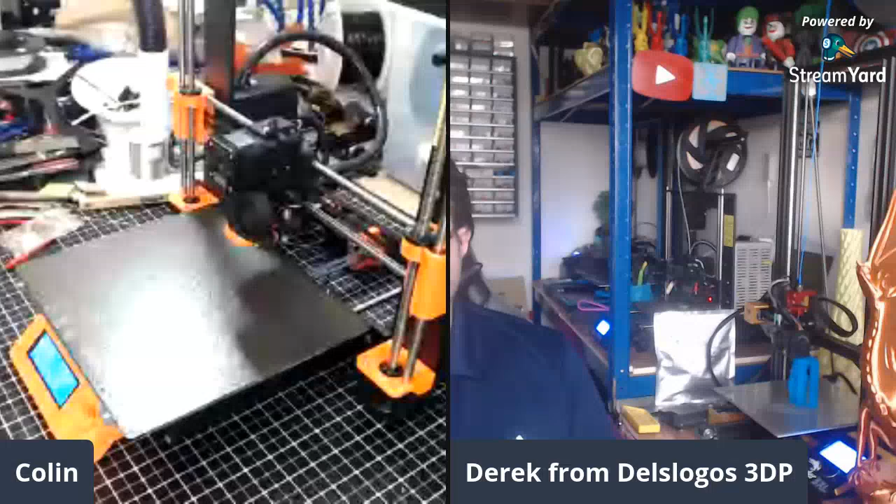Today we will be attempting to assemble not this, but my Prusa-ish Mark III-ish machine that I'm going to bring to the East Coast RepRap Festival.

Derek, thanks for hanging out. This is going to be an interesting one.

I've not used StreamYard before, so it's looking pretty slick. It's got a lot of cool features. I guess somewhere in here I've seen that people will add display comments from YouTube.

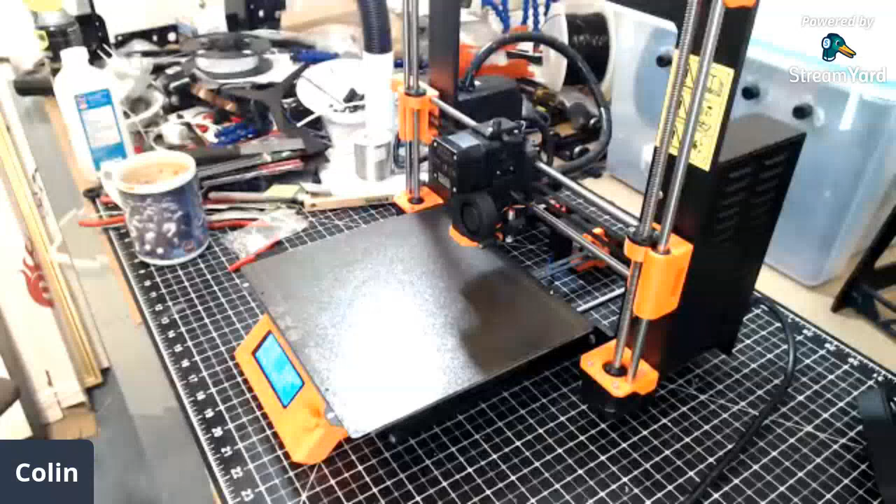I don't see how that's accomplished yet. Enter example banners. Okay, so you can build banners, but somehow you can present comments from YouTube. So this is 2 up, this is 1 up. It doesn't... oh, I guess I can remove from stream. Solo layout - it's not clear how you get the solo layout. Oh okay, there you go. Set your solo layout, side by side, 3 up, or however many up.

Share screen. Okay, that's cool, share screen. Well, that's not share screen. And that's something else. Okay, well, so...

How does one present YouTube comments? Banners, brand, private chat, comments. Aha! No, that's the private comments. Or no, maybe that's the YouTube comments.

Have you listed the program on YouTube yet? So apparently it's managed - I didn't do an announcement, I just went live. So apparently it's managed entirely through the StreamYard API, not Wirecast.

So you're half off screen there. I guess is that a function of having selected the half screen layout? Okay, you can have it as 2 full screens. Okay, so I see what's going on here. So you have top chat, live chat.

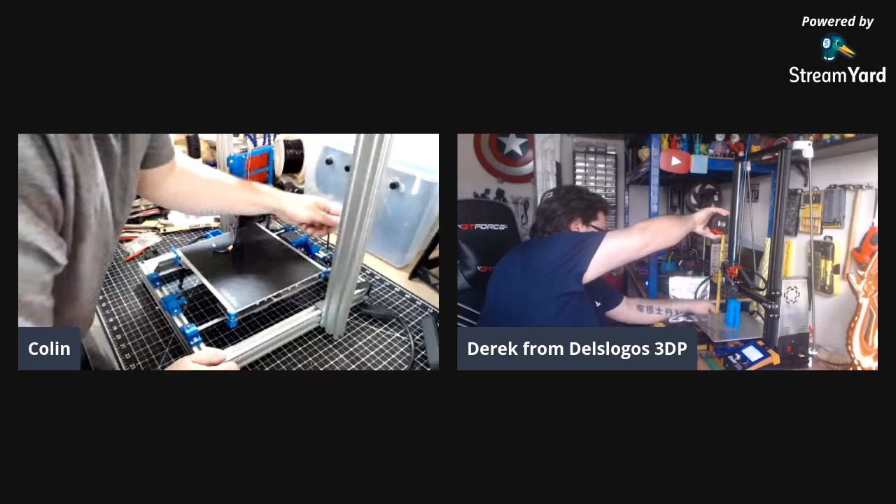Yeah, I mean, obviously you lose a little bit in height - you lose a little on the top, and on the bottom. The bottom, until you get to the build surface - those things are for the bottom rails, right? Yeah. Yeah, you lose a little bit at the top, and obviously at the bottom you lose up until the actual build surface. So, to the build surface itself, you're losing nearly 70 mil just to the build surface.

I'm doing this the wrong way, aren't I? Oh well. I should be disconnecting the bed, from which I need a Phillips screwdriver. Okay. Unless I can just sort of slide this over. No, it's not going to work. All right, I need a Phillips screwdriver.

Hey, right back. All right customer - yeah, I'm guessing the wife wants to watch TV, so better let her do that.

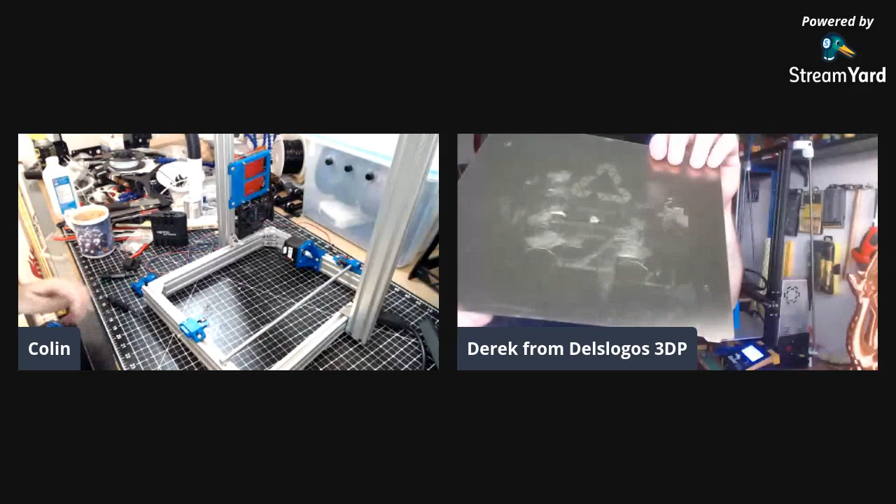Yeah, the worst case scenario is when you get a brand new build plate, a lovely PEI sheet, and then you do that to it. Well, that I actually did - did I do it at ERRF last year? I think I did it almost immediately afterwards. I got a replacement sheet from the folks at BuildTak from their booth. They were very kind to give me one, and then I proceeded to grind the head into it because on the very next print my Z sensor died.

So I spent the rest of ERRF trying to get a replacement 5-volt inductive sensor, which of course nobody had. Eventually I gave up and went with a backup and put back the mechanical sensor, and then printed a few things. But yeah, there were a lot of people there with some very, very dead printers. It was sad in one way, but I felt great camaraderie with everyone who had put their printers in a car and allowed them to vibrate themselves apart for 6 or 8 hours.

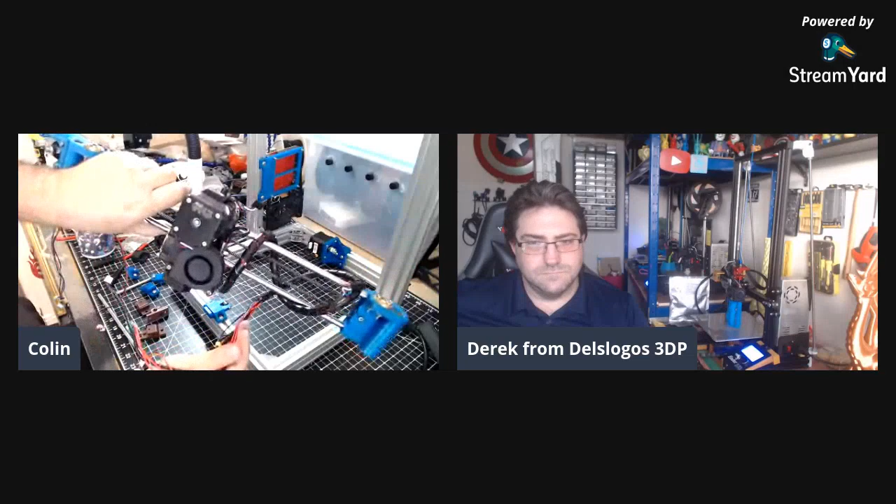So that's going to be moved over, and the main difference in the x-axis is going to be the width between the rods. We're going to use the Prusa width instead of the ANET width. Really, all that means is I need to replace the two back plates of the carrier, the X carrier. But am I going to run into problems here with this? Yes, certainly.

Okay, so I have a little elephant foot in here. That's irritating. Well, that's one way to fix it, just push it through. This is a glass table, so I'm not sure I want to do that too often. Not a good idea. I have files. Let's see, have I a sufficient round file? Yeah, maybe.

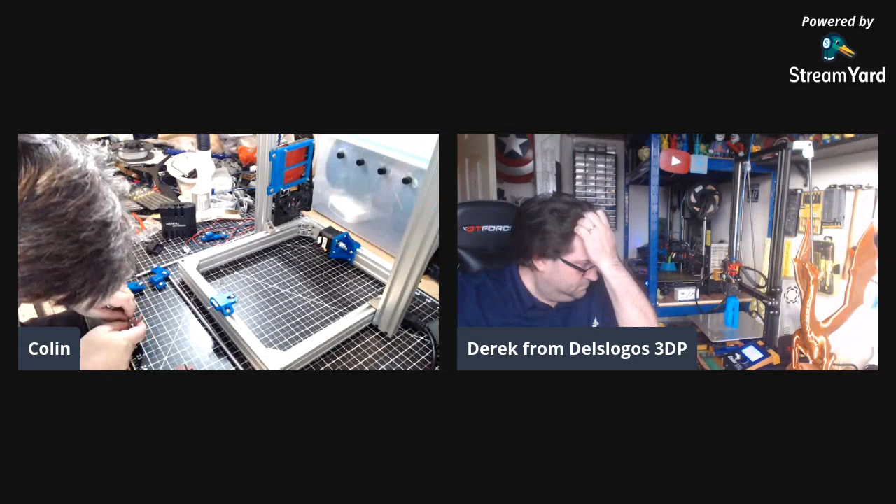The other thing that's going to be interesting about this build, or not so much interesting as problematic, is the Z height is really, really tight. I think it's a couple of millimeters shorter than, well, it's not actually, is it? Not actually shorter than the Prusa. I think the Prusa is actually shorter than the ANET by a couple of millimeters. But the alignment of the top and motor mounts are going to be interesting.

Yeah, by virtue of the sizing of the rods, again, where the Prusa motor mounts have a cap that encloses the rod, whereas the ANET allows you just to slide it through.

So, Scalda, what have you been up to? I think he's disappeared. And Gustner said nothing in a while. Should we just assume people disappear? Yeah, we should just assume that we're boring.

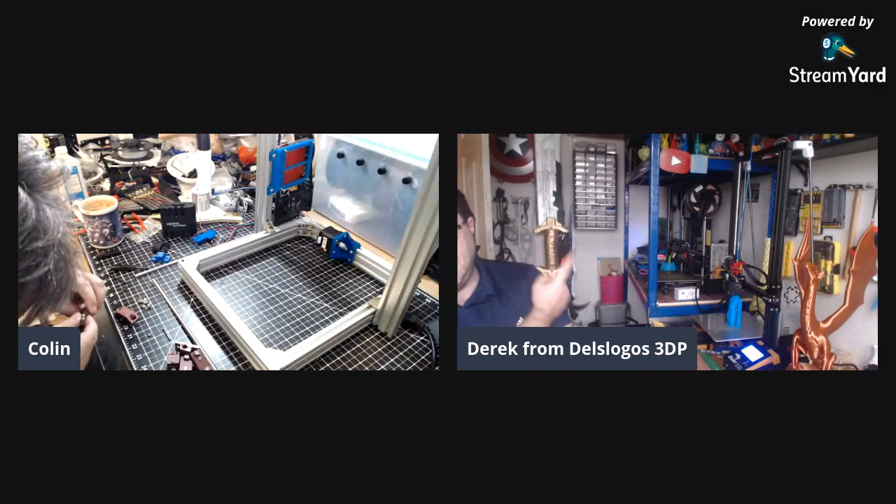Yeah, but when you get a design from someone and print it out, such as my Thanos blade, you'd think that there wouldn't be any post processing on it. Well, I mean, not necessarily. I guess to assume that any other designer would be against post processing to the extent that I am is unreasonable. But no, I guess I'm just lazy or something.

Well, the blade came out fine, I'm quite happy with it. A lot of people on Twitter all jumped in, even Joel Telling, even Uncle Jessy all jumped in and said it looked really good. Yeah, it's not a model that I hear about being printed very often. So that's the thing, when you get these models that everybody and their brother prints, they do it all in the same week or month, and then that model goes out of fashion again.

I guess I might consider printing some of the stuff from the Broken Nerd. He has some really cool designs. Yeah, I mean, I got the design for the Thanos blade off of Sean, off of 3D Skewed. I got it off of him because obviously, supporting the people I like and stuff. Yeah, so he's a good guy. I mean, yeah, I got it from him.

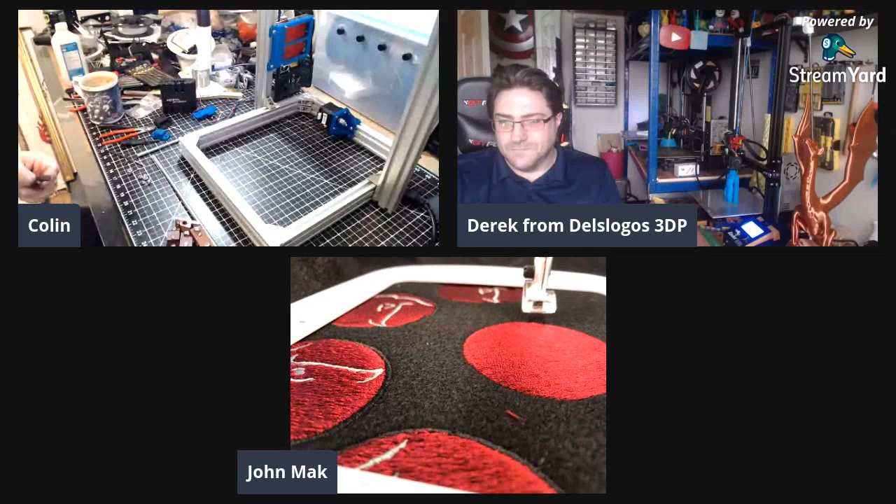This Delslogos logo. Oh, that's cool, so who was it? Somebody was complaining that they were not getting a hat, they were kidding, but who was it? I can't remember, I'll let them hassle you for it at some other point.

So how's that going? Are you gonna end up turning that into a business? Yeah, it's Ken's business, so it's already going. Just changing color or changing filament.

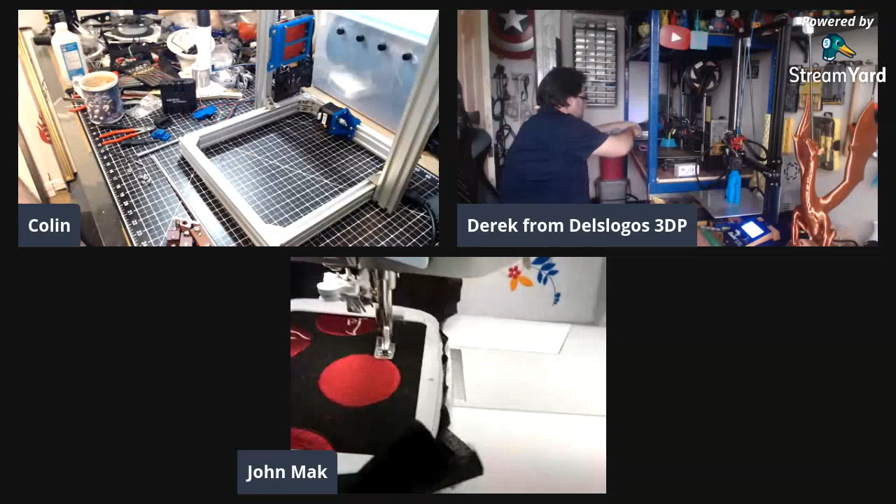So what's the timing on printing something like that? It just depends on how many stitches, the density of stitches. Yeah, that makes sense, about 15-20 minutes, depends. Really, that's not too bad. Beats 3D printing, in one layer.

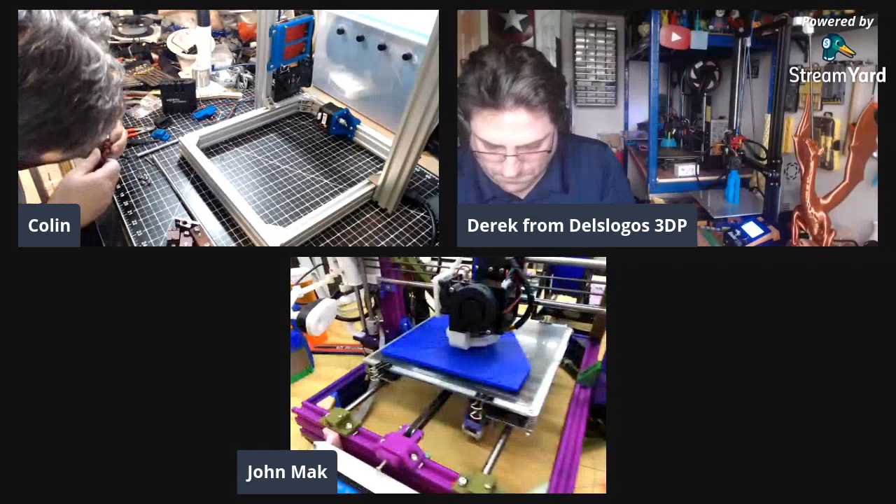I do have 3D printing too, but I'm just printing like templates for programs.

So are you streaming on YouTube or some other way? Yeah, YouTube. I was trying out Wirecast earlier, they've got a mechanism called Rendezvous, it's very cool, but it doesn't lend itself to this kind of hangout environment. It's more tailored to scheduled guests, where you have the guest join the session, and then you can set up a screen layout where they can appear, but I was encountering all sorts of other issues.

So it's time to change the gray filament. Attempt number two.

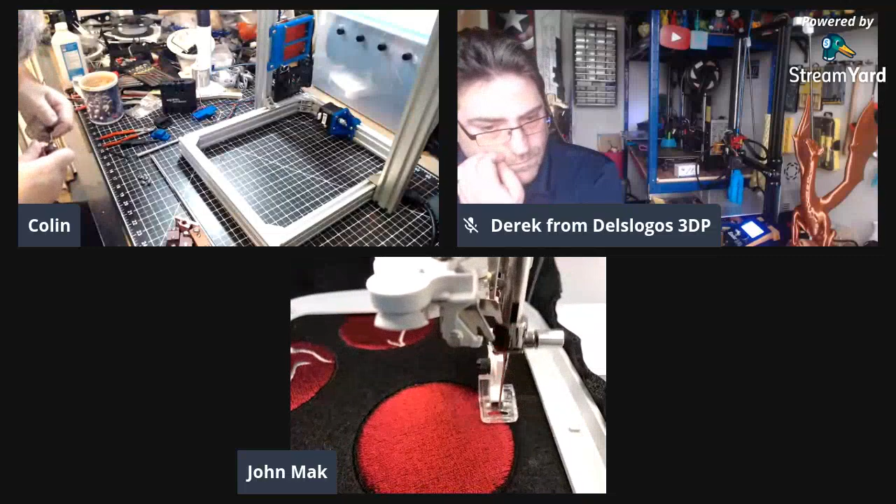While we're singing the praises of the AM8 reinforced build kit, one of the things they had were motor mount and y-axis layout jigs, which were very cool. Surprised other of these designs don't include them. Just stitching the gray.

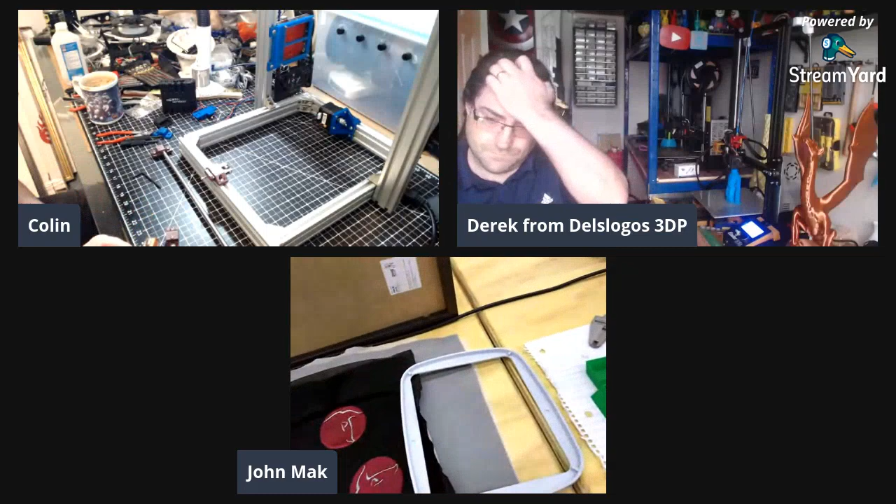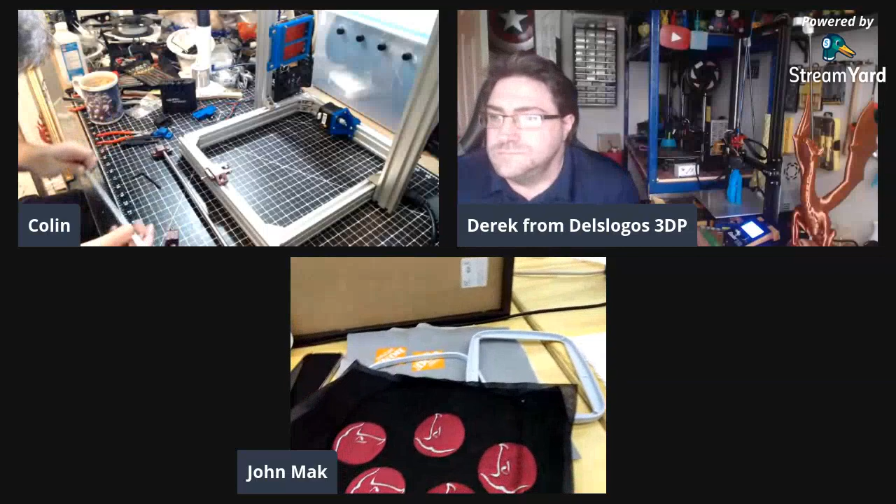Let's see, I guess I want these all facing the same direction, I could cut it out and send it to him. Why would you? And then this one, yeah, this guy. Sure fits. Okay, cool.

Well, printing these parts on the Prusa is so much better than printing them on - what did I print them on last time? No, I printed them on the original A8. Which, can we see the original A8 over here? Yeah, there we go, original A8.

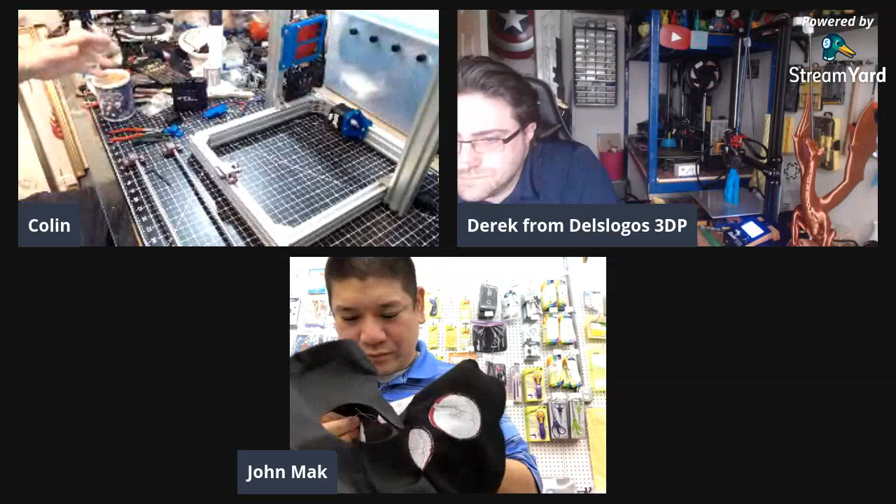Those other blue parts, where did they come from? They were all printed on the old frame, and I then took the printer apart and just hoped beyond hope that I had printed all the right parts so I could put the printer back together on this frame. Back when I had not so many printers.

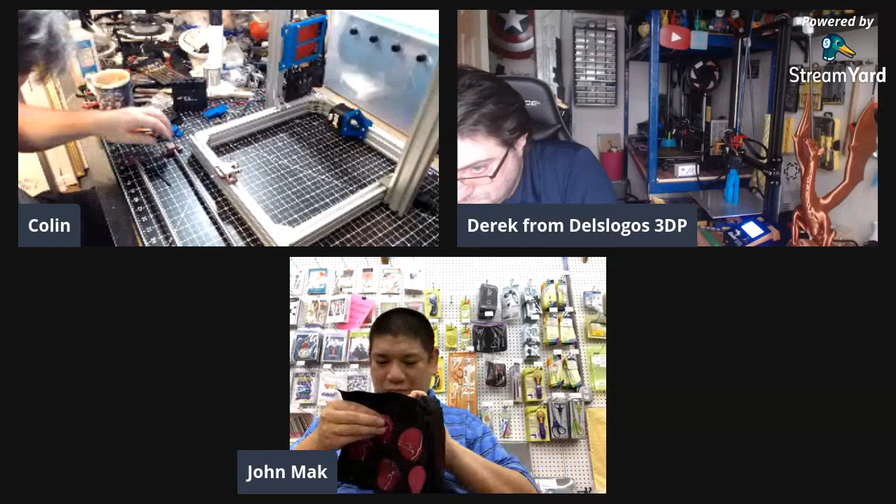I guess before I put this on, I should put the motor on. Maybe. What do we think the correct order of operations is here? Motor mount first? Probably is - no, I can't remember. I'm certainly not looking at a manual, that's just admitting failure. Oh, I thought you got an AM8 already. I did, I just don't remember what the order of operations was. This was an AM8, now it's going to be a Prusa Bear.

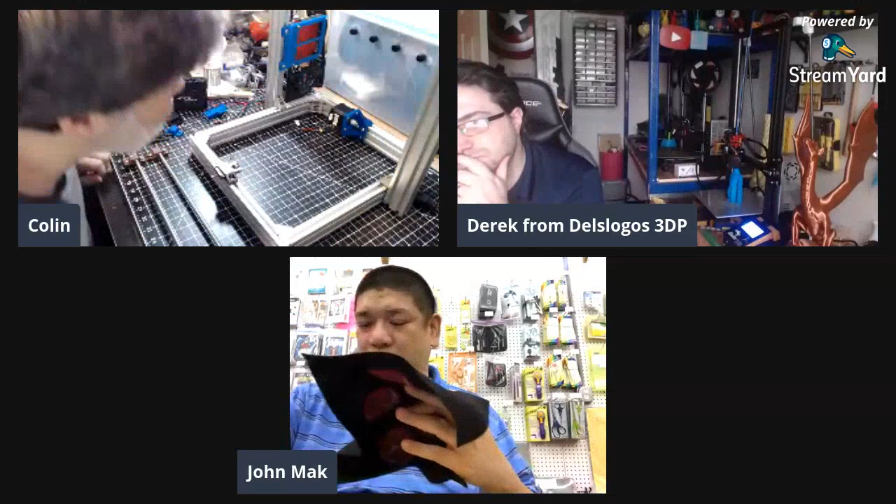So I guess first we need to remove the motor from the mount. Or do we? Maybe we don't. No, we can unmount the thing without removing the motor, that's probably better.

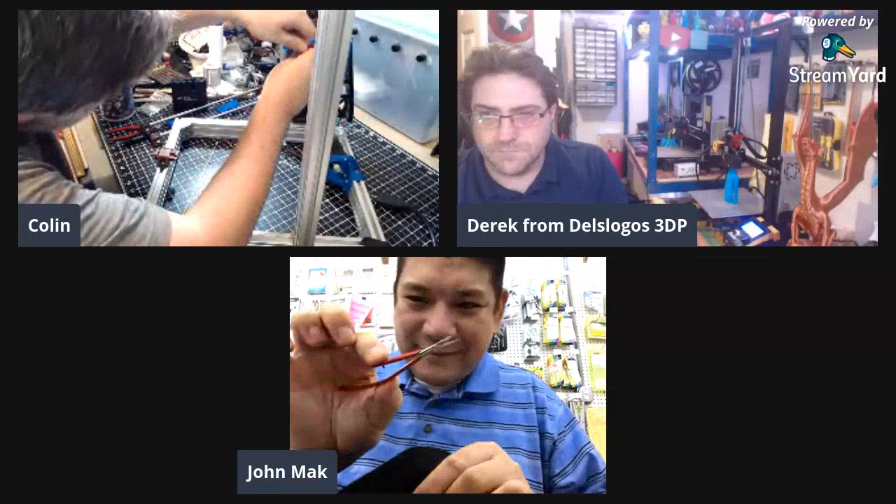Although I should probably remove the electronics here since those are definitely - it's my tiny scissors. Precision tools, don't knock them.

Now what did I do last time I was doing this? Oh, this is my solution for pulling out hammer nuts.

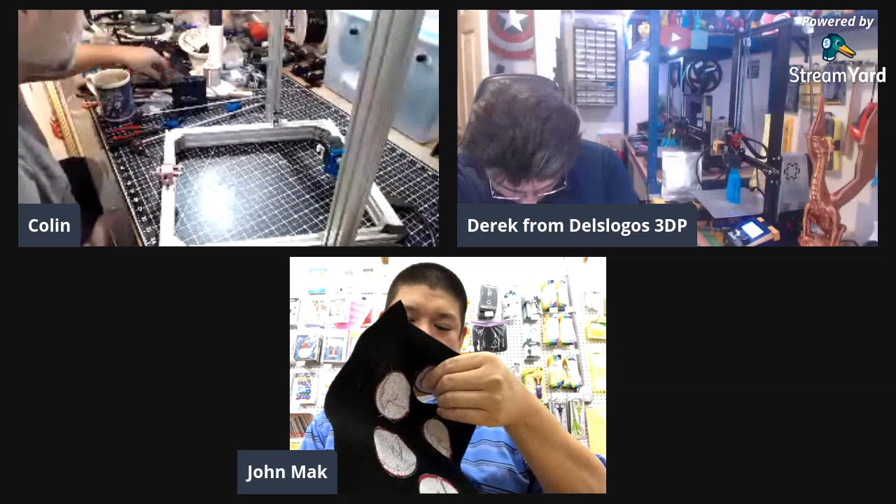Oh, that was my high security electrocution preventer, because I had the power supply mounted here, but there was no bottom to the switch cover. Was it already plugged in? It was not the safest arrangement.

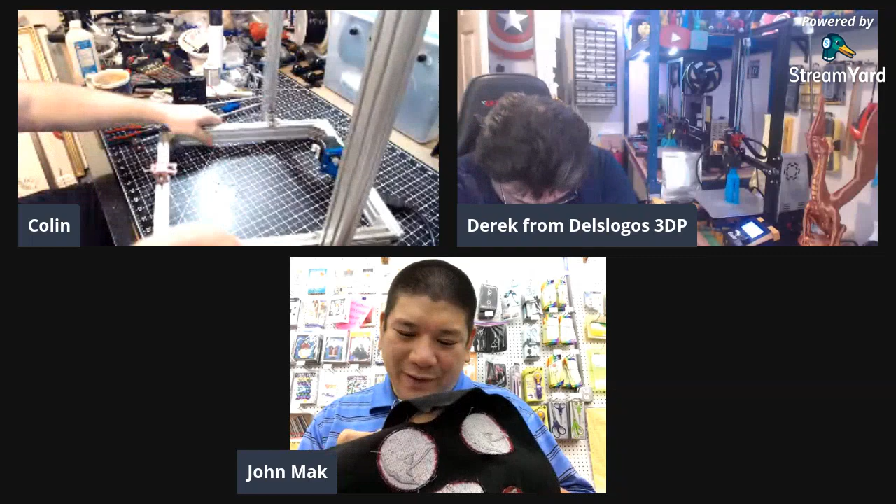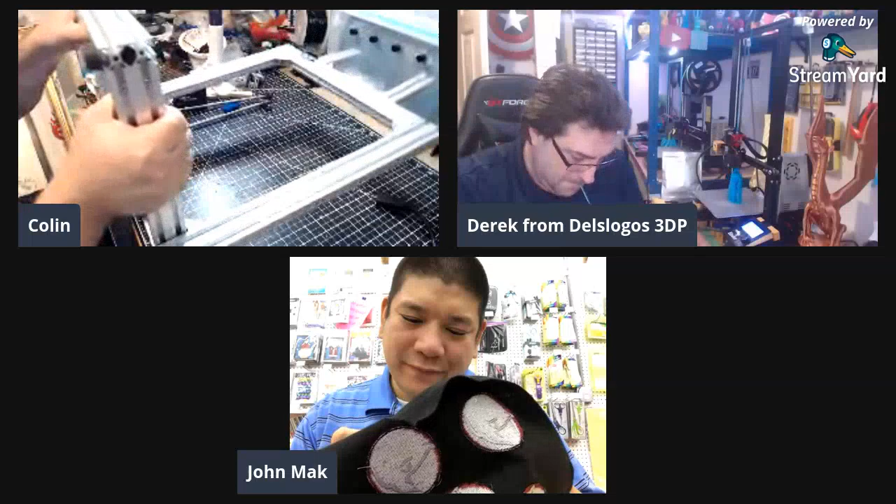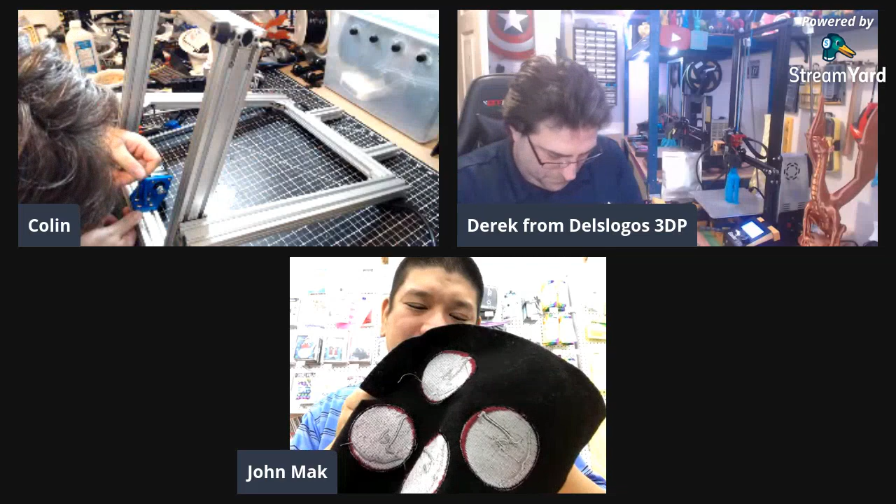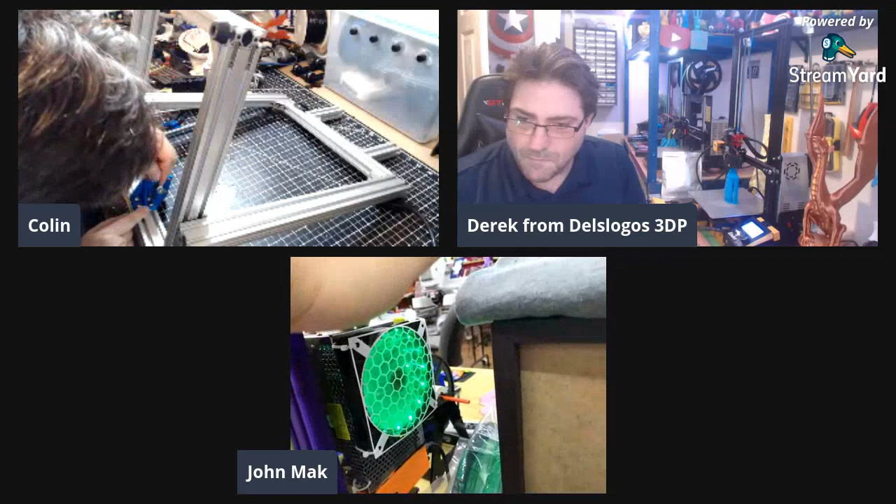Yeah, that was actually one of the first things I did with my AM8, was replace the power supply. I'm still on the original power supply though - it's been going on like 2 years now. I just have to keep it cool with a big giant fan.

Although I imagine you could put a Raspberry Pi on there and control the color through some web interface if you really wanted to. I think Octoprint actually has a plugin for RGB lighting. Do they? Oh, turn green when the print is done, or turn red while heating, and then white while it's printing. Huh, I remember reading about that.

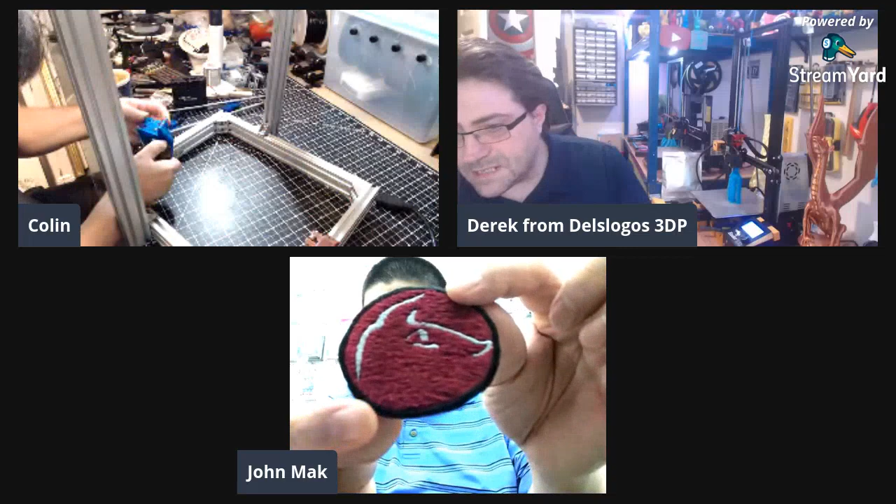That's not bad, so there's one patch cut out. Yeah, that's cool, is that for llama? Who's that for, John? Yeah, Tom Llama - 3D printing llama. That's really cool.

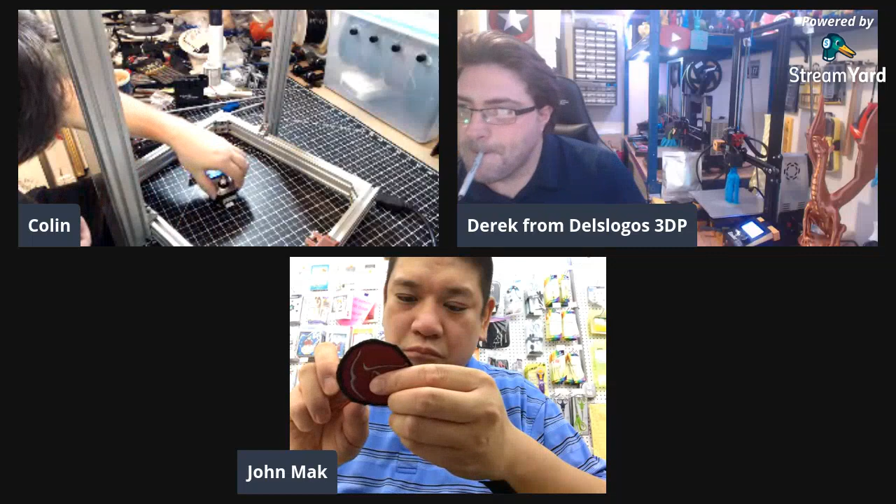I guess I'll use the big scissors to test out before I use the tiny scissors. This looks like a Y motor mount. Right?

Hey John, what do you think of my Ender 3? Oh, looks good. I should probably get an Ender 3 to replace the A8. How many A8s have you got now, John? Still just 3. Yeah well, 3 is not enough, you got to have 4, make it a nice even number. Yeah, but the Ender could get better quality out of the box.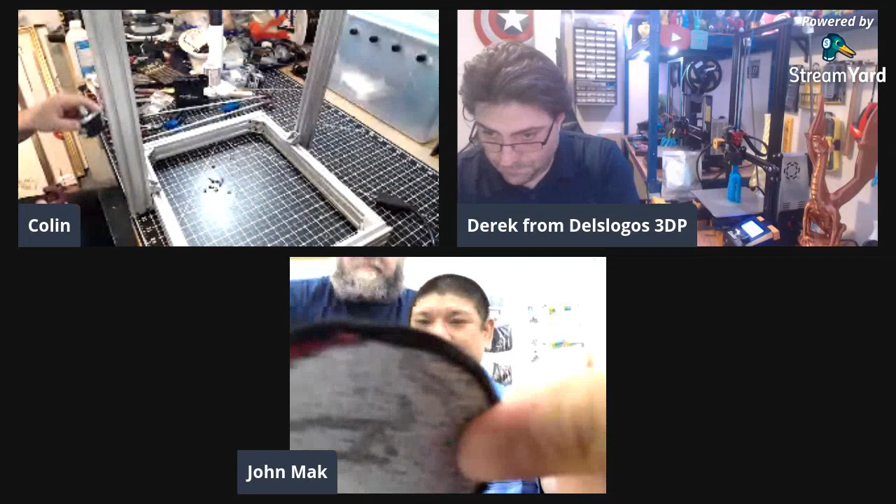But yeah, where every one of the AM8 reinforced parts had like 5 or 6 fasteners, all of the Prusa Bear parts all have like 2. That's no good, is it? Well, I don't know, I mean structurally it doesn't seem any less sound. It might last less well in the car. I don't know, we'll see.

What happened here? So I guess the Bear frame's supposed to be more stable than the Prusa frame? The Bear frame's supposed to be more stable? Supposedly, I don't know that it really is, but.

Oh, this sucks even more. What size of bolt do they expect to use? Am I going to have to redesign these parts? Oh shit. Well, this is a problem.

Don't they fit? Oh, every one of these holes is not deep enough for these bolts. I can't screw something onto that. So you need longer bolts. Need longer bolts. Well, in some cases, I guess, not all.

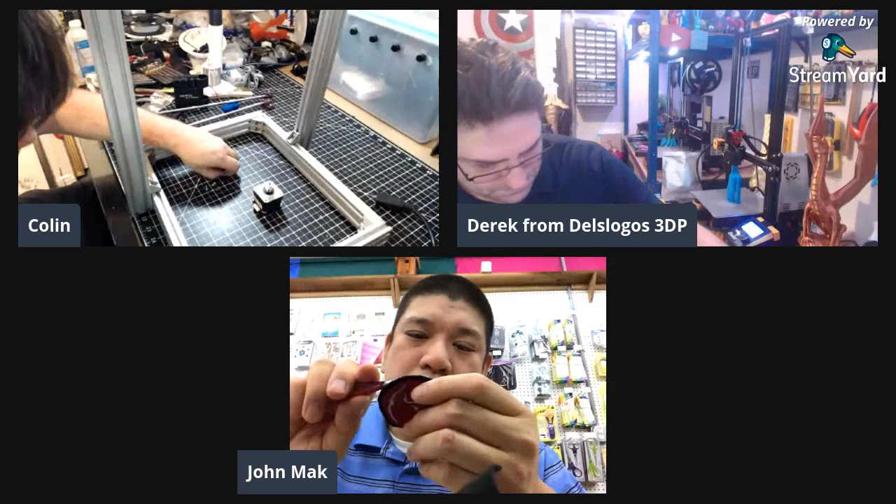Open up Amazon Prime. Yep, there we go. All right, so these motor screws can go in our box of motor screws. Actually, I might just go down to, we have a store here that's sort of a retail McMaster Carr kind of place called Fastenal that probably has the right bolts. Let's see how many of them I'm going to need though. So there's these 2. Let us look at some other parts here.

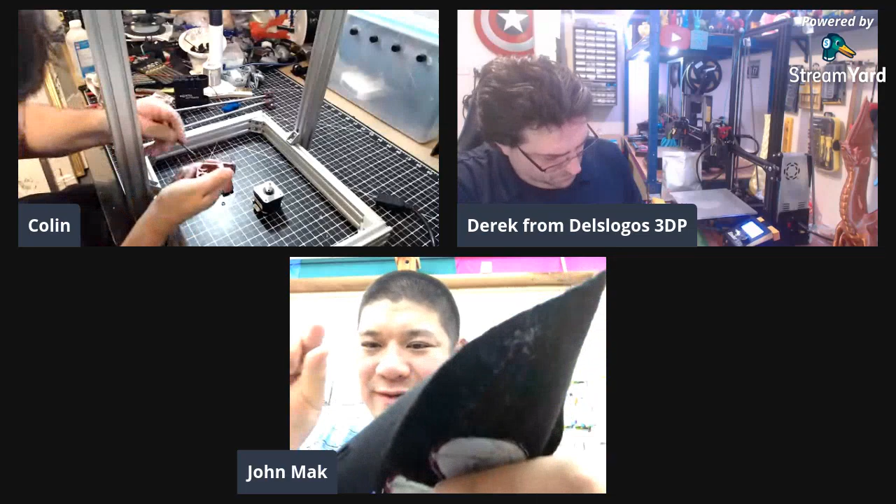I can't push this through because it's rubbing against these two corners. Well, maybe there's a different type of M5 bolt. I'm sure it is, but how many? I mean, M5 is M5, right? I mean, M5 only specifies the thickness of the bolt.

Right, but it also specifies the size of the head. There's different style heads, I guess. All right, I guess they have to be more specific. So there's that problem and that problem. These are not a problem. Okay, so it's this and this.

Now, what I really ought to do is take a piece of extrusion so I can test the issue. How many do I need here? Three each. These fit, right? No, what didn't fit was the Y motor, which requires two, and the Z tops, each which require two.

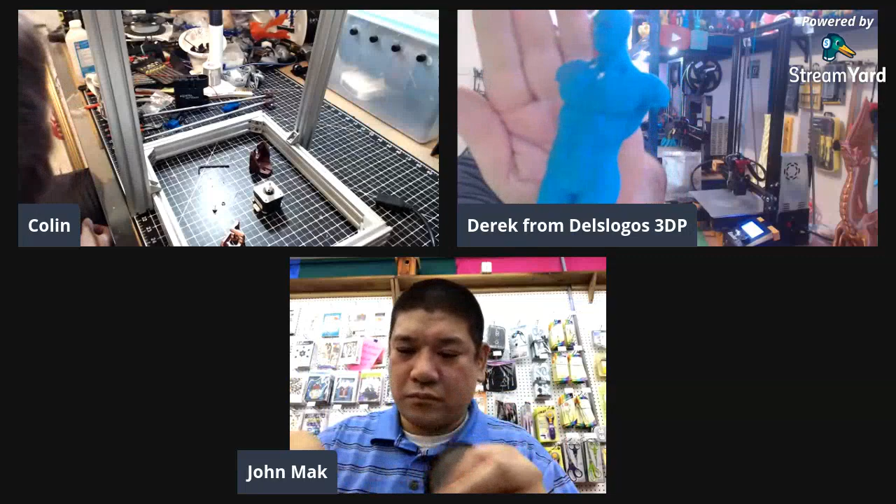And how does the Y motor... Okay, so Z top and Y motor mount. Anything else, other than weird pieces that might require weirdness? The power supply bottom thing here.

Well, I did fully expect this to be a thing. Okay, that works. What are these, M5 by 10, maybe?

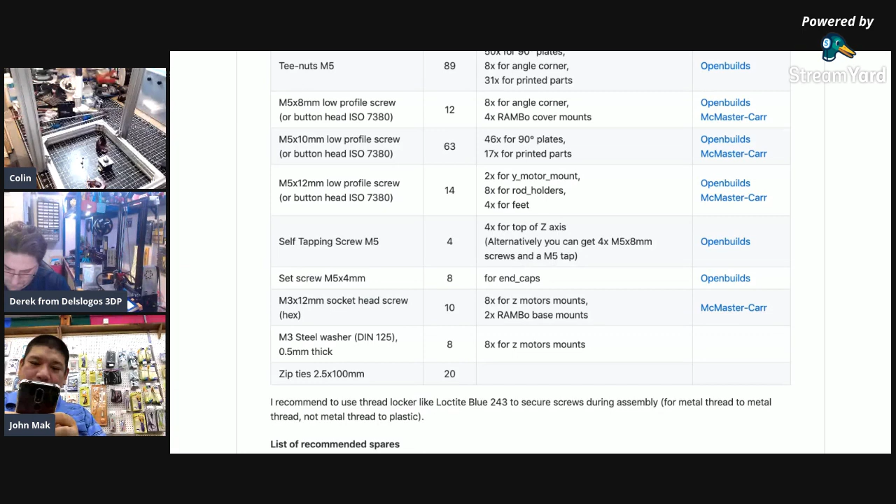That's crazy. All right, I'm almost inclined to go see if somebody else has better Z tops and Y motor mount. Because I mean, I can go spend - it'll probably cost me $5 or $8 for like 10 screws, but that seems stupid.

All right, so let us look at forks. This is not the way to do this, is it? Looking at forks is not going to tell me anything unless I go through each of the check-ins. What would be the better method? I guess Thingiverse, right? Yeah, see if they've got it on there.

Yeah, that will work for the AM8. Well, so I don't know the one with the Y, right, for the AM8 reinforced - it was very cool. It had these little things that just sat in the T-slot, slide the thing back and forth until it slides easily, and then screw it down.

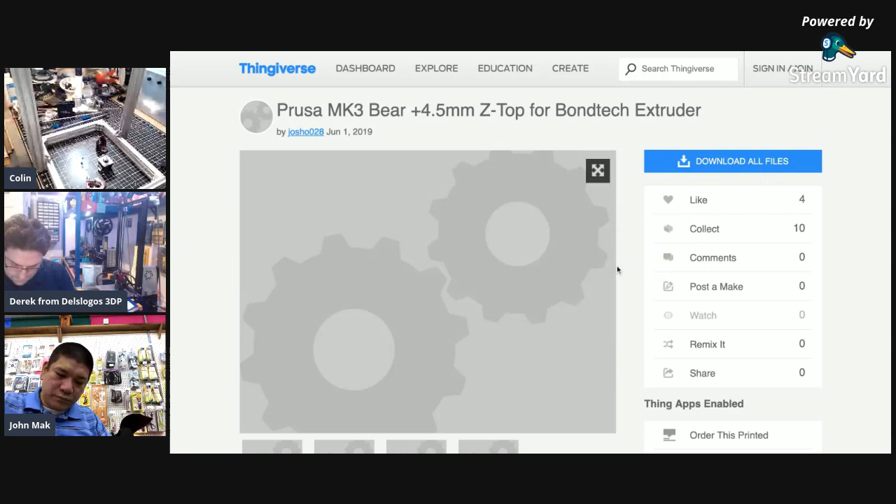There are all sorts of fun things here. I'll have to go through these in more detail. Okay. Mark III Bear plus 4.5 millimeter Z top. For Bondtech? What on earth does that even mean?

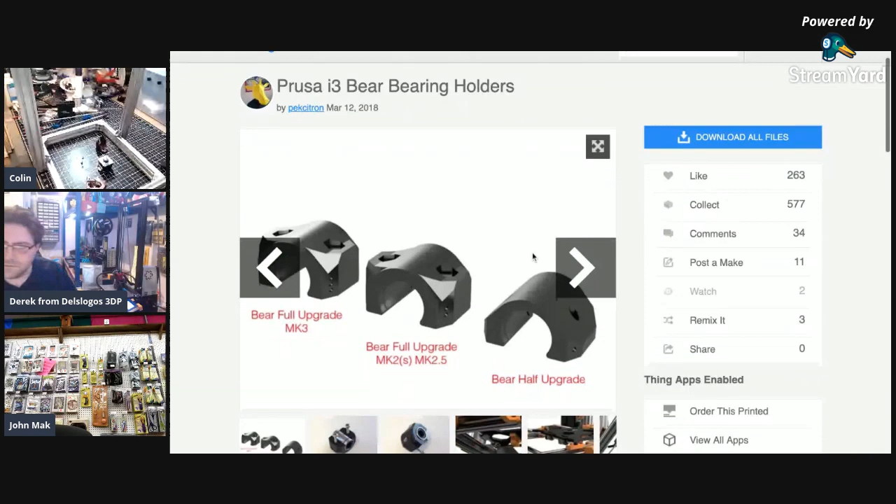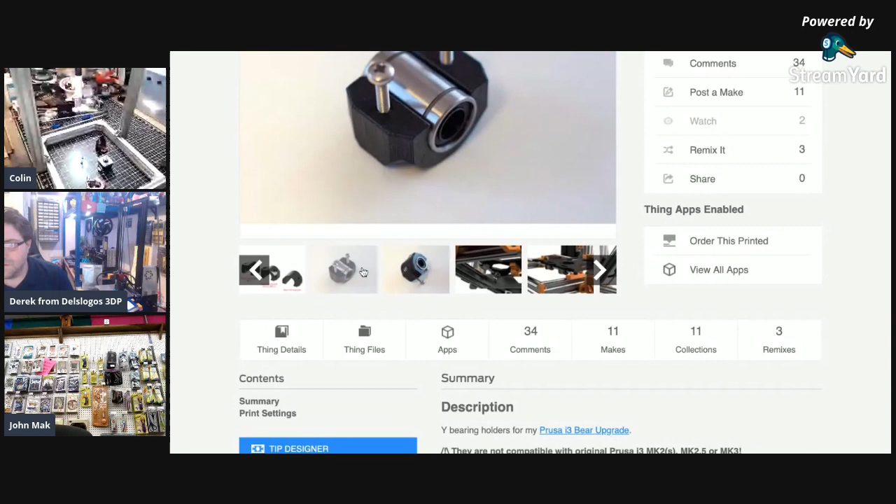So these are not the same bearing holders that I printed. These are somewhat cooler looking. No, well, maybe not. Oh, these don't support nuts. They require significantly longer screws. Okay, I printed the right ones then.

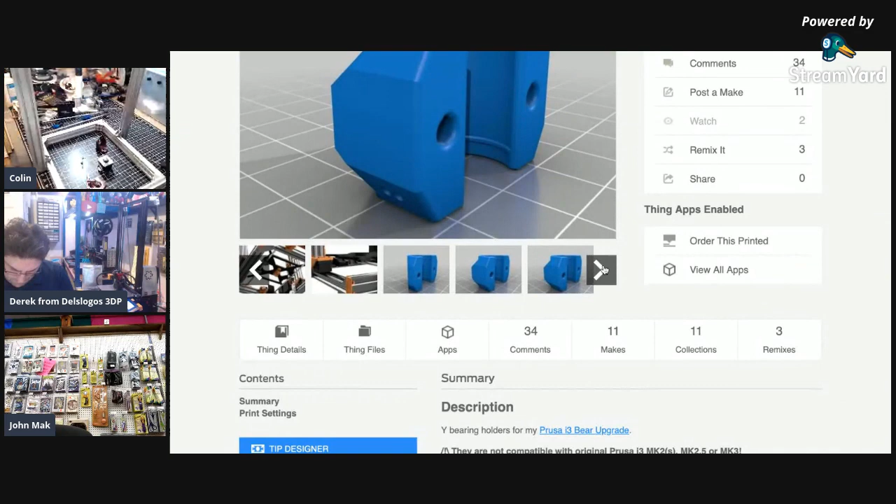Yeah, these don't support captive nuts. And why are each one of them different? M3 by 16. Yeah, that's crazy. All right, anyway.

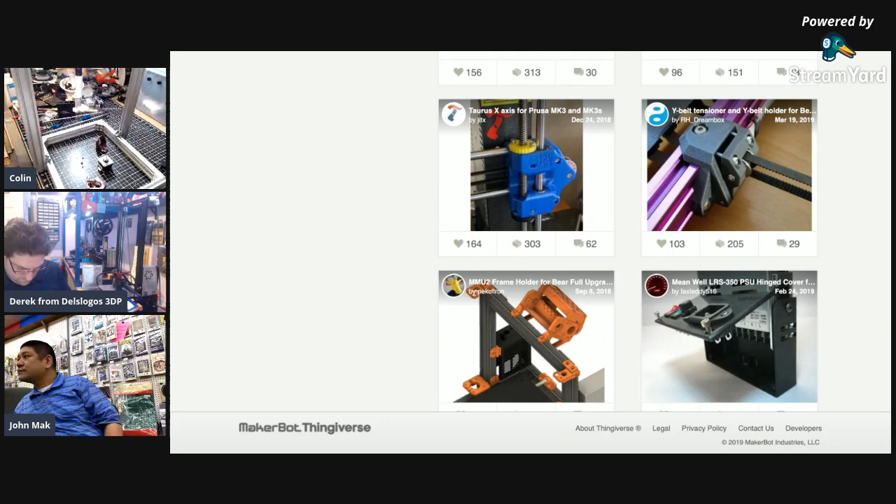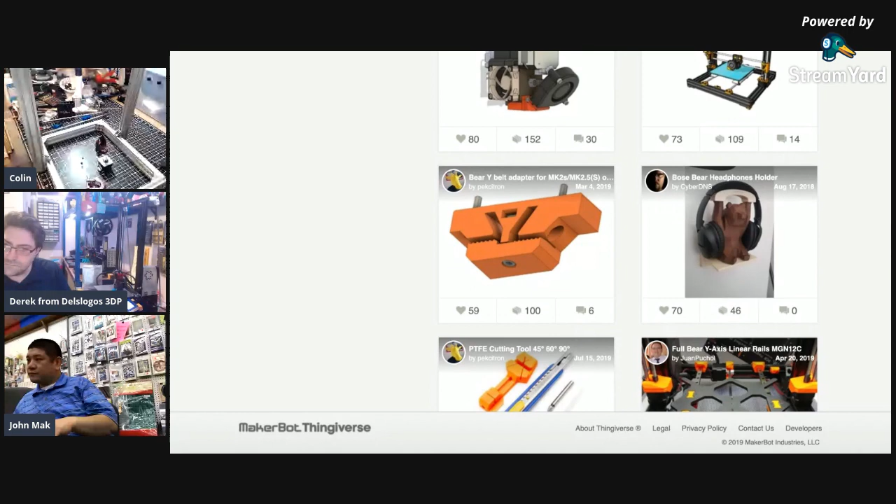So this is the Y belt adapter that Ron was suggesting that I use. This one with this Y shape. It's kind of neat. I don't know if I need it though.

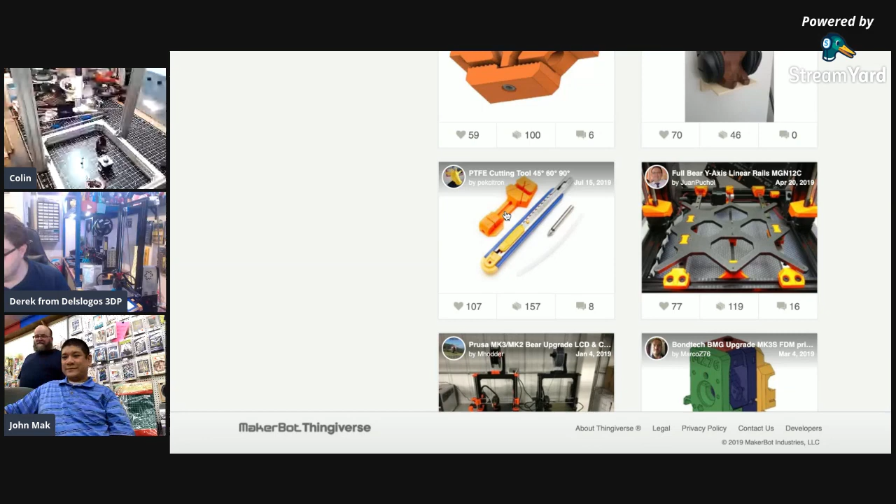There's all sorts of good stuff here that I hadn't noticed. PTFE cutting tool. That's cool. Little jig.

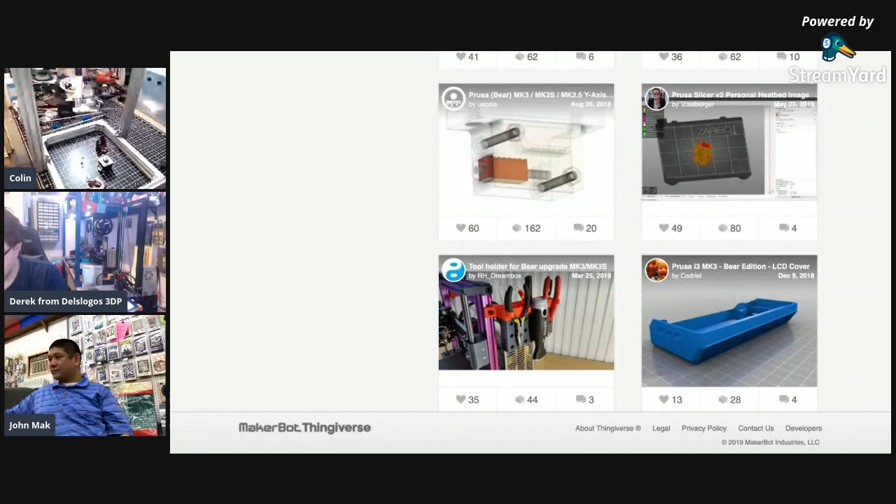But nothing that addresses my problem. Well, I think for expedience, all right, let's go back and look one more time at... step and STL. Oh, that's irritating.

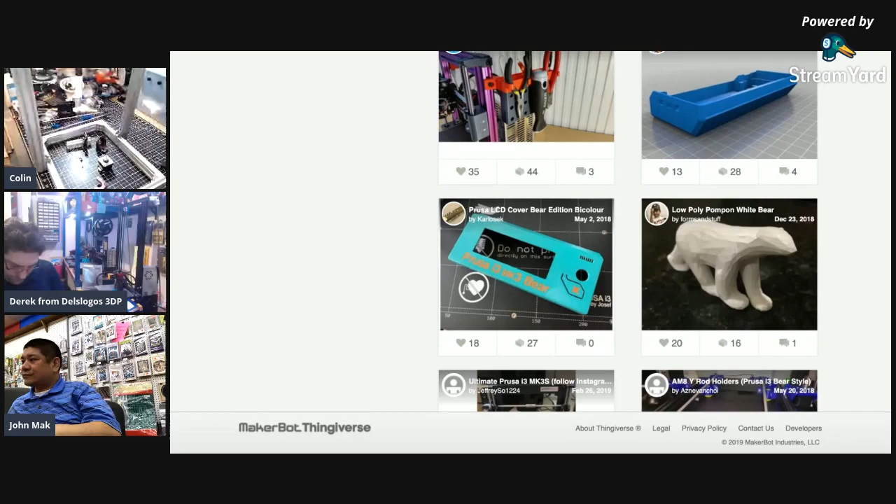That's better. So what's with the upside down stream today, John? I don't see anything upside down. You definitely are. Okay, so we've commented on it maybe 3 times during the stream, and you didn't catch the comments. What? Yeah, you've been upside down the entire time. My video is... is your upside down? Tablet upside down? No, it's right side up. I mean... okay, the other side. There you go.

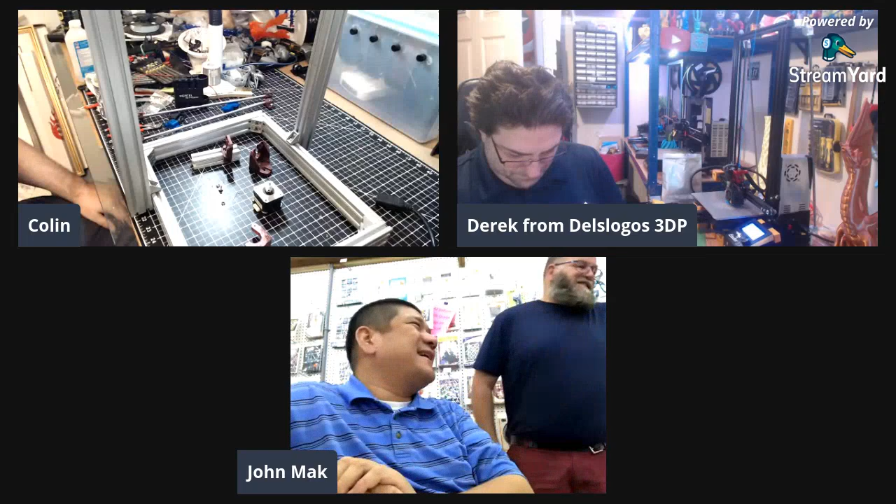So, rotated I guess. That tells us that there is a flaw in StreamYard. When I'm looking at it, it rotated on my view. Now you appear upside down to yourself. No, it rotated in the same direction as everybody else. Weird, okay, so your view came out right, but it was streaming to everybody else upside down. So now you're right side up for us, so you're upside down? Yeah, it was upside down the whole time. Why? Because my iPad camera... but see, it rotated fine. Oh, so this time it rotated correctly. What's the difference? That's interesting, the first time it rotated, it failed to do the rotation. I don't know, so we should have had you do this an hour ago. Now it works, basically turn it on and turn it back off. Yeah, turn it off and on again.